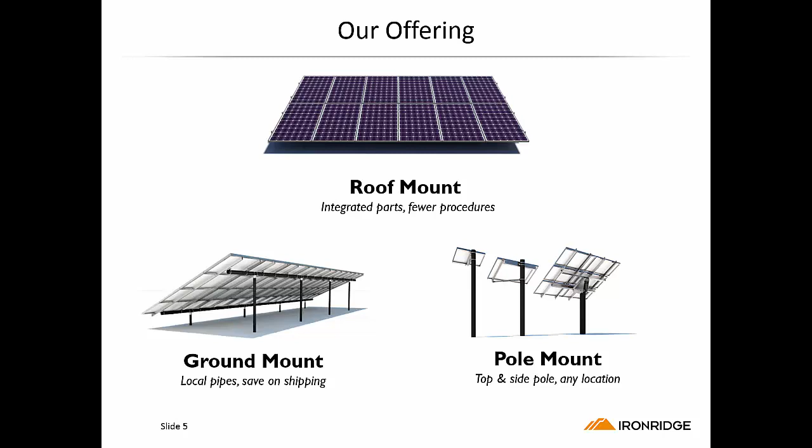We have three separate major lines for our solar racking systems. We have roof mount, we have ground mount, and we have pole mount.

I talked a minute ago about quality, and when I talk about quality of our product, it's not just IronRidge patting ourselves on the back saying we make a great quality product. We like to validate that in many different ways. One of the ways we prove the quality of our product is actually taking it to third-party companies for their evaluation. Anything to do with UL testing, could be the fire testing, or the integrated grounding system, we take to Intertek for all of our UL testing.

We utilize IAPMO, a third-party evaluation service, to evaluate our product and the performance of that product. We are an ISO certified company. If you're not familiar with ISO, it's a third-party organization that's not only looking at our product, but looking at how we interact with the end user of our products. They look at how we're packaging our products, how we ship our product. They're looking at our overall office procedures here at IronRidge, and we are an ISO certified company.

We used to have a tagline saying, "Make solar simple." We truly strive for having a very simple product to use out in the solar industry. In the same token, we really want to have a very robust, strong product as well. Truly, that's our goal, is to make solar stronger. So we changed our tagline last year. We want to provide you with the strongest racking system available out there in the marketplace.

So in today's training, I want to go over a few different items. We should take a look at the roof system itself and some of the challenges with roof mounting. I want to touch a little bit on the code; we'll hit on a hot topic here in California with code. We want to look at the IronRidge product line itself for roof mount, and then we'll spend some time on the Design Assistant tool, designing a system on the tool to show you how it works. Awesome tool. Then we'll go through some installation tips and tricks I've learned over the years that I'd like to share with you.

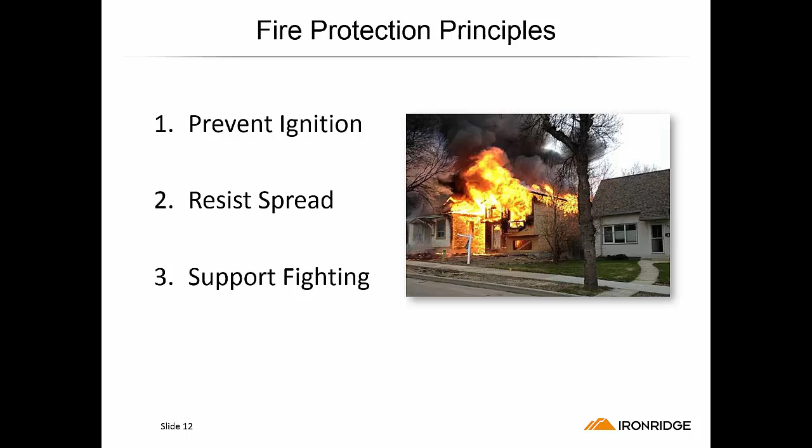What's really a hot topic right now in California, and will become nationwide next year, 2016, is the code changes. International Building Code actually changed in 2012. Just now in 2015, here in California, we adopted enforcing this code. And that's basically stating that a PV system shall not diminish the fire rating of the roofing material on the structure. The key word there is system.

In the past, it used to be the PV modules had to have a fire rating. Now it's the entire system - that includes the racking, which must also have a fire classification rating. What it boils down to is, if you have a Class A fire rated material for your waterproofing membrane of your structure, the installation of the solar system must not diminish the fire rating classification of the waterproofing membrane or the roofing material on the structure.

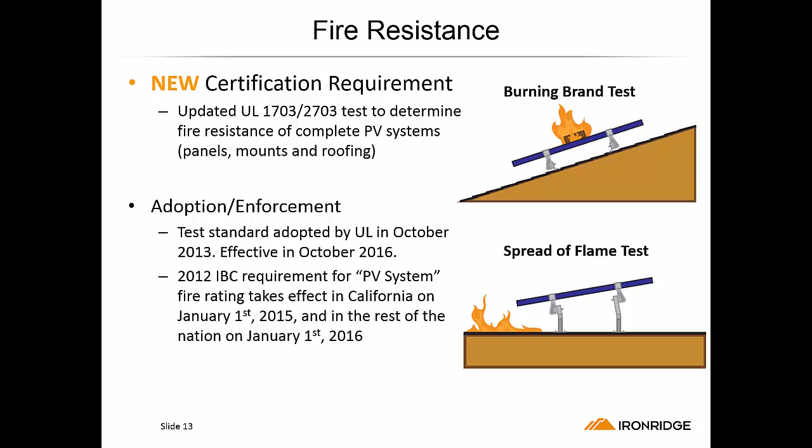As you think of that, I want to let you know that here at IronRidge we've been proactive with this. As soon as UL set the testing standard, we jumped right into working at having our racking system tested under this new code requirement. We've completed three rounds of testing now with steep slope roofs, flush to roof or tilt mounted. We carry a Class A fire rating for Type 1 and Type 2 modules. If you're mounting flush to roof, we are also Class A fire rated for a Type 3 module on steep slope. On your low slope roofs, we are Class A fire rated for flush mounting or tilt up system for Type 1, Type 2, and Type 3 modules.

As I was saying earlier, it's pretty amazing as you get into the solar industry, everything that the solar designer or solar installer needs to be knowledgeable of. It's so much more than just the NEC or the electrical code. We need to be knowledgeable of what Mother Nature is going to throw out there at that location as far as wind loading and snow loading. Definitely need to know the geographical situation and what's there for loading conditions.

NEC, I'm an electrical contractor. I'm a perfect fit for this, no problem there, but I do need to be knowledgeable with the modules that I'm using, what they produce for power, what inverters I'm going to use, the proper sizing of my wiring for my inverters and modules, and definitely be following codes with how I'm going to install my wiring.

I need to have a structural background. I really need to be thinking about the framing of the structure, the spacing between the rafters, maybe just the spans that those rafters are performing in that structure, and what the acceptable loading is going to be as I add a solar system to that structure.

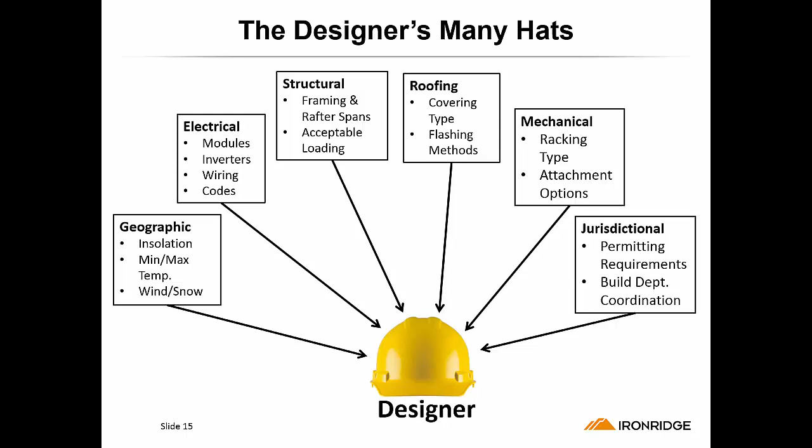Or maybe the building department does not have an expedited permit process, and I need to be really knowledgeable with what the jurisdiction is going to require for obtaining that permit, even with the permit review process, minimizing the time back and forth with the building department, making sure I'm going into the building department with everything they need right from the very first application for my project to make a quick turnaround time to get that permit.

So let's go ahead and take a look at the IronRidge product line itself. Earlier I had noted that at IronRidge our tagline used to be "Make Solar Simple," and truly we strive to maintain that as well. When you look at our product for roof mount, it is a very simple product. We have an integrated grounding mid clamp for attaching the module to the rail. We have 3 rails in a rail family that I'll tell you about. And then we have a great all-in-one flashing product which will make a very quick installation of your attachments to the structure.

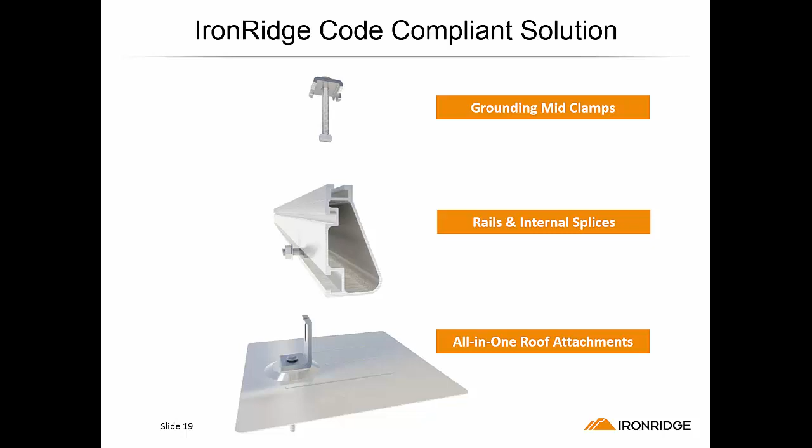In the development of our products for roof mount here at IronRidge, we strive to have a code-compliant product that you can use nationwide. A minute ago I talked about the rail family we have here at IronRidge. We have the XR1000, the XR100, and the XR10. You truly now have a choice in the rail family to choose a rail that's going to be most cost effective for the loading conditions of the site you're designing for. Possibly it's not just the loading conditions, but maybe it's the structure you're working with for installing or designing a solar system.

That XR1000 rail used to be called the XRS rail, and we've renamed it in the new rail family as the XR1000, but it was our signature rail for years. This body shape adds a lot of vertical and lateral strength to our product. So we went ahead and added 2 new rails to our product line, the XR100 and XR10, each a little bit smaller in rail size to work with whatever the loading conditions are and be able to utilize the most cost-effective rail.

Interesting to note is that as you're installing solar systems, you're not installing them flat. Truly, you're putting them on a sloped roof, or in a low slope roof application, you're putting them up on tilt legs. But in all of these applications, you're putting them up on an angle.

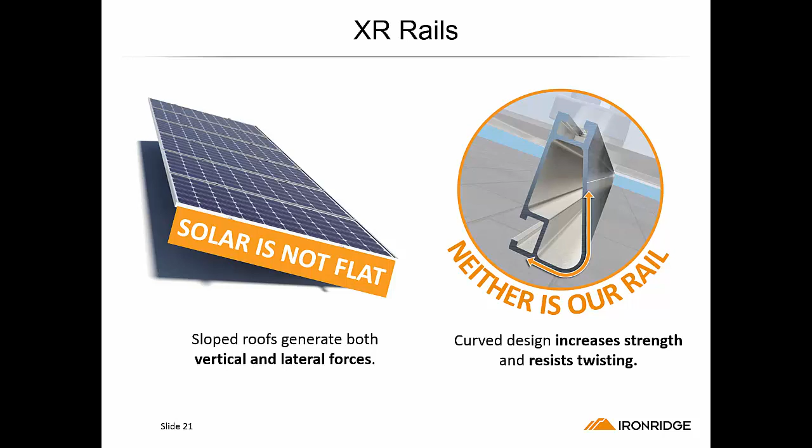And truly, that's where the body shape of our rail adds a lot of strength to the overall installation and attachment of your solar system to the structure. This body shape adds a lot of vertical and lateral strength that resists twisting, and also is going to really hold well as you're installing on these sloped conditions.

Kind of interesting, we had a little fun at the shop at IronRidge one day. We went ahead and built some ramps at a 4-foot spacing, and then tried driving different weight vehicles across different rail just to prove the strength of that body shape. Obviously this was a non-scientific test, but it was a lot of fun actually proving the fact just by driving different weight vehicles across our IronRidge body shape rail compared to the traditional box shape rails available in the marketplace.

Just if you get time, go to our website and watch the video. It was a lot of fun making the video and actually proving the point. My 9,000-pound Dodge diesel truck driving across some IronRidge rail at a 4-foot spacing. Phenomenal, the strength in that body shape.

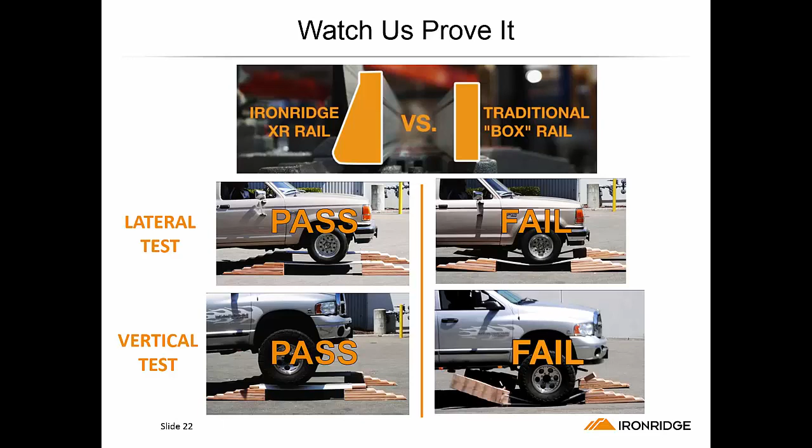Alright, so as we keep talking about all this strength of our product, we need to be thinking about the value of this strength that we keep talking about. And it really plays out in 2 different ways. One of these is the spans that you can achieve between your attachment points in the structure. Obviously, the longer the spacing between your attachments or the spans of the rail, you will be able to design a system that has fewer attachment points in your project. The other option in the strength of our product is utilizing what we call the cantilever strength, and we'll go over both of these here in just a minute.

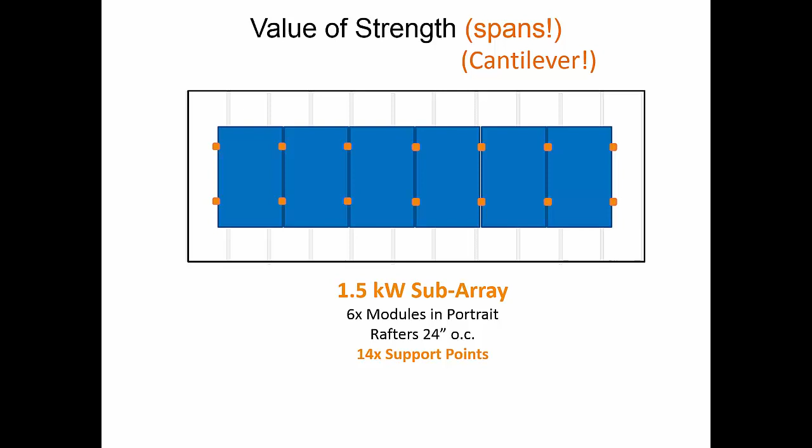Just note, if you don't understand, cantilever is the amount of rail that can extend beyond the last attachment point in the structure. So as we're looking at the XR10 rail at a 4-foot spacing between the attachments, and we start comparing that to possibly other applications, it's pretty cost effective in utilizing this XR10 rail. I call it our small baby rail, at a 4-foot spacing in the attachments. When you compare that to maybe doing a 6-foot spacing of the attachments, yes, that XR10 rail can even achieve up to 6-foot spacing on the attachments. Truly, we can reduce the cost by about 6 cents a watt.

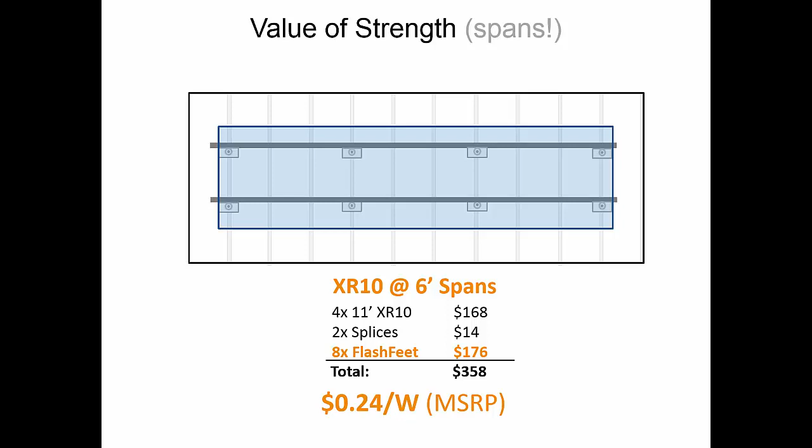These are all suggested manufacturer retail price, so just be aware of that. We use suggested manufacturer retail price as a level playing field in comparison, but truly you're going to get a great discount from any one of our distributing partners on our product.

So as you start thinking about maybe wanting to achieve an 8-foot spacing between your attachments, that's where I would step up. Go to that XR100 rail and then go ahead with an 8-foot spanning and design in your project. You start thinking about the added cost going to that larger rail, that XR100 rail. Your cost has only gone up a penny a watt because you've reduced the number of attachments in your project. So obviously you've reduced your labor as well as the material.

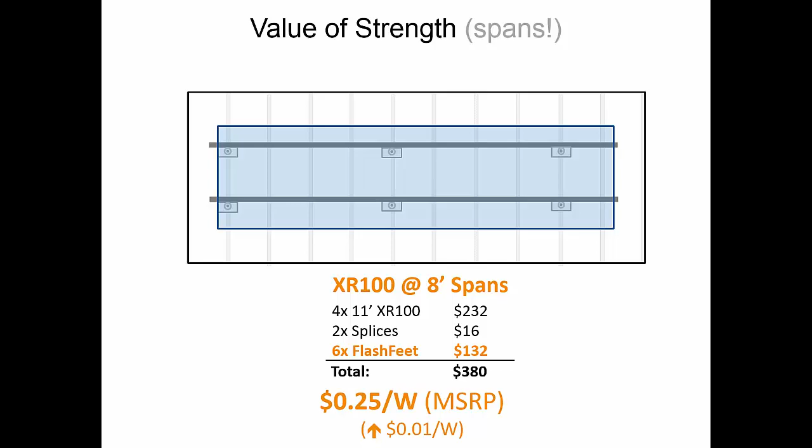So I spoke a minute ago about the cantilever strengths of our product. In all of the body shape in our rail family and that strength that we have in the product of the rail family, this is where you should be thinking about utilizing the cantilever strength of our rail. As you start thinking about going to a 6-foot spacing between your attachments, as you increase the distance between your attachments, you're increasing what we call point loading to the structure. Truly, to turn it back into a distributed loading as much as possible with increasing the spacing of our attachments, we want to be thinking about staggering our attachments in a project if we can. This is where that cantilever strength of our product becomes very valuable.

Truly in 2 rails in a row of modules, as per the bottom illustration here, we can start one rail with an attachment right at the end of the rail. On our second rail in that row of modules, start the first attachment 1 rafter space in. Then continue the spacing of your attachments as per your design, and this is going to give you a staggered attachment in your overall row of modules. It's going to be placing the loading to multiple rafters within that structure, turning it into a very distributed loading situation. Much better for the structure. There's 2 ways that we can utilize this cantilever strength.

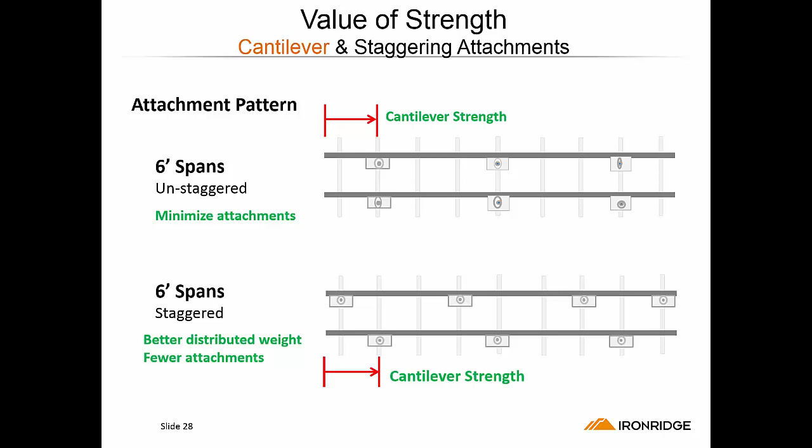If we're doing a fairly minimal spacing between our attachments, like 6 feet, we may want to go ahead and cantilever both of our rails in a row of modules, minimizing the total number of attachments overall. Or your other option is to use that cantilever strength in one of your 2 rails in a row of modules and just do what we call a staggered attachment as per the bottom illustration. Obviously the illustration at the top is going to completely minimize the number of attachments, where the illustration below is going to minimize some of your attachments but provide a very good distributed loading to the structure.

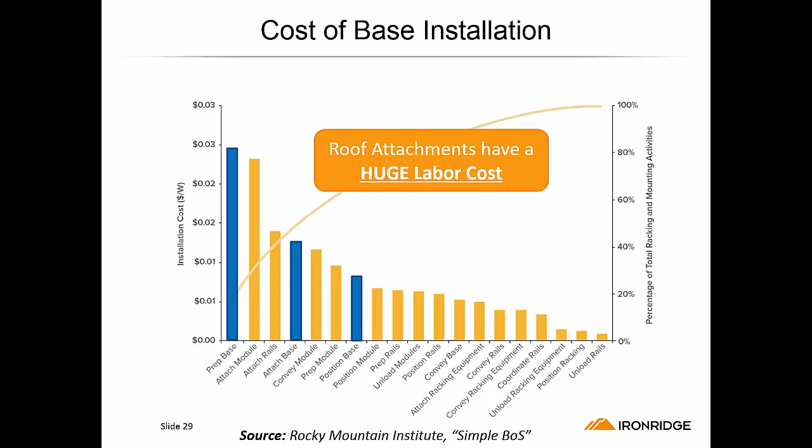Interesting when you look at some studies that have been done recently with overall labor statistics to installing a solar system. What they're finding is the amount of time it takes to install the attachments, to lay out your rafters, locate the rafters, get your flashings installed properly to waterproof your penetrations, seems to be one of the largest labor items in installing a solar system.

Or maybe it's just the spacing you're wanting to achieve in your attachments. Maybe you have very minimal loading, but you want to go to an 8-foot spacing in your attachments. That XR100 rail will be your rail of choice. And then I always talk about the XR1000 as our big bad boy rail. Truly a very phenomenal rail. This rail can span 10 to 12 feet between the attachments. Maybe your rail of choice for a commercial application where you're trying to reach 10 or 12 feet out for your spacing to attach to main purlins in a project.

Possibly you've got some extreme loading conditions. Maybe you're on the east coast to the far north and you've got 80 pounds per square foot of snow loading. And maybe you've got extreme wind loading conditions. Maybe you're in hurricane territory where you've got 150 mile an hour winds. That XR1000 is going to be your rail of choice, whether you're at extreme loading conditions and still doing a 6 to 8 foot spacing between your attachments, or that commercial project trying to reach out 10 or 12 feet to your attachments.

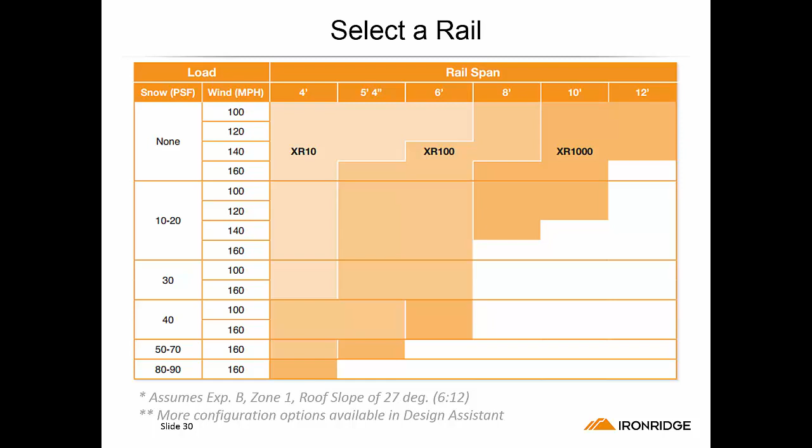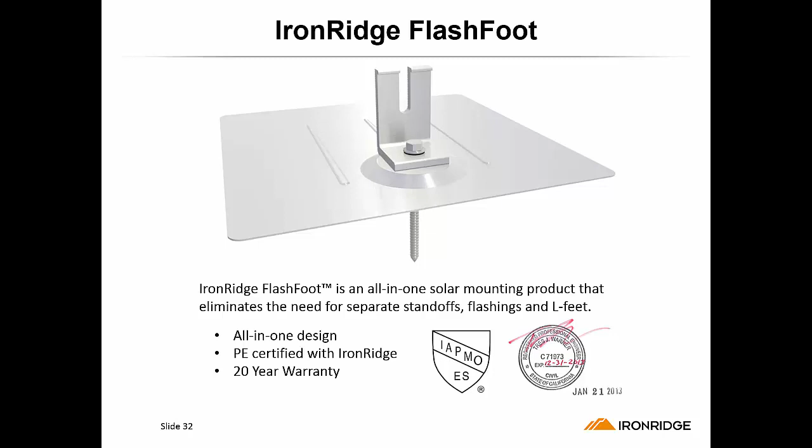FlashFoot. Truly, it's an all-in-one flashing attachment, and it has a great 20-year warranty with it. When you look at our flashing attachment, it has an L-foot with a cone shape. This cone shape is going to compress over a rubber bushing that's in our flashing, and it's going to compress that rubber bushing against the bottom of the L-foot, against the flashing itself, and around the diameter of the shank of that lag bolt, totally sealing off your penetration that you're placing in the roof.

What's really nice about the design, I know a lot of people are a little hesitant with a flashing that has any rubber parts in it, but the way this is designed, that rubber bushing is totally concealed underneath the L-foot, which totally eliminates the rubber bushing from ever seeing any sunlight or air pollution that can break it down over time. So it's very long lasting. Remember, this has a 20-year warranty to it. The other great feature with our flashing attachment is truly being all-in-one.

It installs very rapidly. If you use a chalk line to chalk out your attachment locations, we have some creases that increase the strength of the flashing itself, but are also designed to act as a guide to show you where to place that flashing. No putting your head against a hot roof to look for that tip of the lag bolt and where it has to enter that pilot hole. Truly, if you use a chalk line, you can use these guide marks on the flashing to install the flashing directly over your pilot hole location.

Then you're going to put your lag bolt through the L-foot and use your battery impact gun and drive that lag bolt into the rafter. Once it's tightened down, it's ready for rail. And truly unique is our open slot L-foot, making it a very rapid installation of the rail to the L-foot.

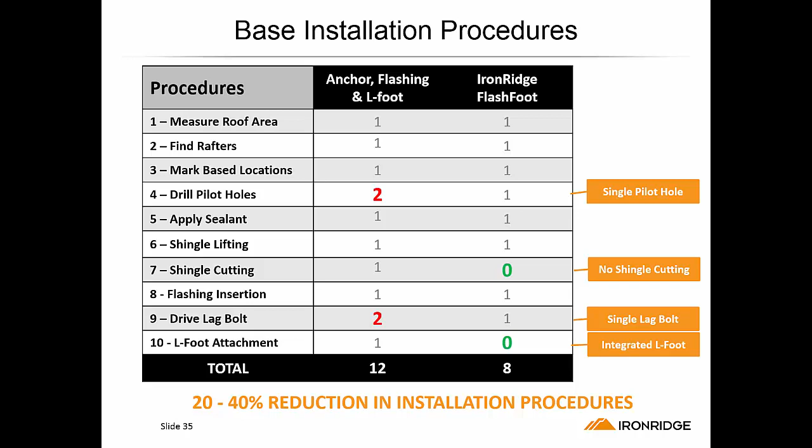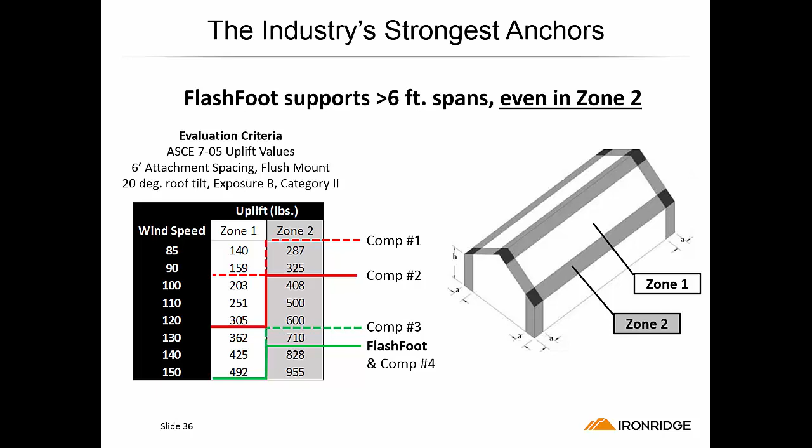When you look at the different steps that are generally involved with installing a flashing attachment, our flashing attachment, FlashFoot, has eliminated 4 different steps in most flashing attachment installations, definitely reducing your labor as you're installing your flashing products. When you look at the overall strength of our flashing in the attachment to the structure, we're side by side with one manufacturer. The two of us are truly the strongest flashing attachments in the overall solar industry. It's almost kind of scary when you start looking at some of the other third-party flashing attachment companies out there and what the strengths of their products are to the attachment of the structure.

Integrated grounding: awesome, simple product, and yet it truly is just great at providing that electrical grounding and bonding connection of the modules to the mounting hardware. Like I said, very simple product. It's a mid clamp with some teeth in it. These teeth bite into the anodization of the module frame, providing a good electrical bonding connection from module frame to module frame, and then it transfers that grounding and bonding connection through a serrated flange nut into

the bolt. On that T-bolt, we've added some teeth to bite through the anodization of our rail and provide that grounding and bonding effect from the module frame to the rails. All of the IronRidge rails are anodized to protect them from corrosion. Just truly a very simple product, but very effective in the performance that it's built for.

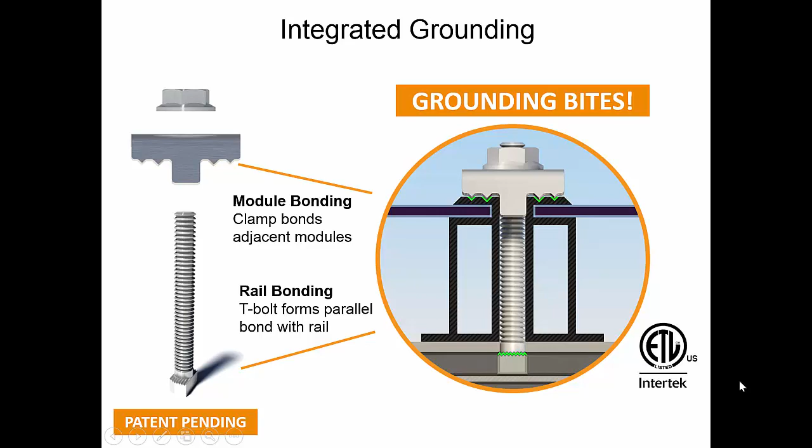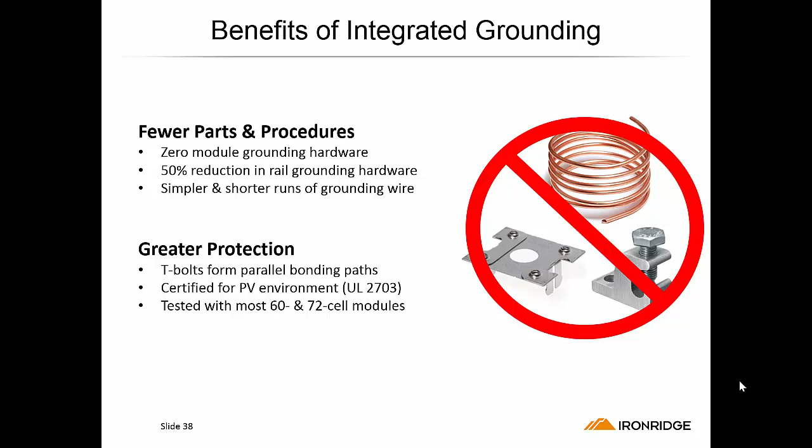The benefits of integrated grounding: so many people just immediately think, no more WEEB clips, and they're just thankful for that. But truly, the integrated grounding system does much more than just get rid of the WEEB clips. It eliminates 50% of your rail bonding and 50% of your splice bonding. And all the multiple parallel paths of bonding through those mid clamps provide a much better, more robust, strong grounding and bonding condition than we ever had in the past.

This can show you right here, in your 2 rails in a row of modules, you only need to place an earth ground connection on one of those 2 rails. Whichever rail you choose to place the earth ground connection on with a lay-in lug, if you have a splice in that overall length of rail, you'll place a bonding jumper at that splice location. The second rail in your row of modules no longer needs an earth ground connection and no longer needs any bonding jumpers at the splice locations.

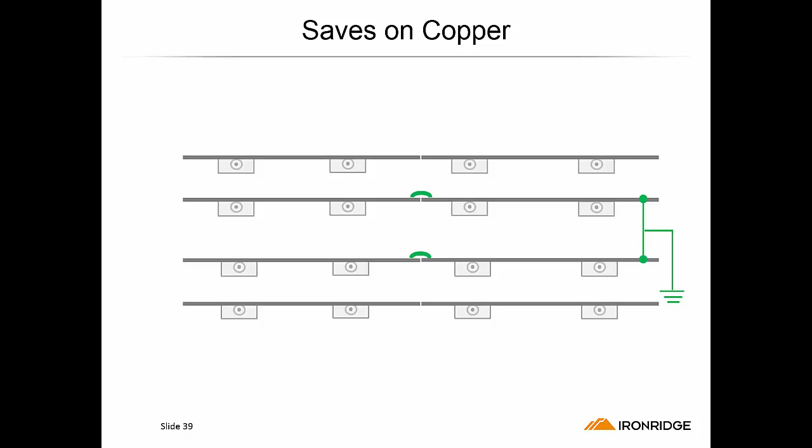So right off, you can see 10 to 15% fewer parts depending on the array layout of your design. Obviously, fewer parts, less cost in materials. Fewer parts, less labor as you're installing your system.

All right, design and permitting. As we get ready to start thinking about selling a solar system, we're going to go out and do a site survey. We're going to get educated on what the local code requirements are with the jurisdiction as far as designing that system. Then we're going to come up with our array layout design, and start thinking about everything we need to provide to that building department for the permit package.

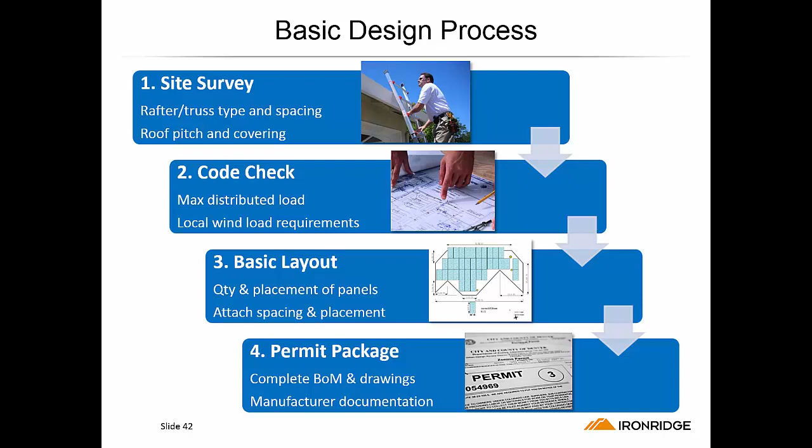At this point, I want to get on our Design Assistant tool and show you how to design a system on it. The Design Assistant tool from IronRidge is just awesome. It does so much for you. It's going to auto-calculate your wind loads and snow loads. It's going to generate a complete bill of materials, and it's going to provide instantaneous pricing in the design tool, so that as you're choosing between the different rails in the rail family, or the spacing between your attachments and the number of attachments in your project, you can make choices that give you the best pricing possible in your design.

So I'm going to take us live onto our website now, and we'll design a system here quickly. Alright, we've gone live onto the IronRidge website, and the opening screen scrolls through some different items that are new to IronRidge that we want you to be aware of. Yeah, the ground mount, we can do 5 up now. The new rail family available here. Just some interesting notes as it scrolls through the opening page of the website.

You'll notice the different product lines listed at the top of the page. Also take note at the bottom of the opening page of our website, you can download a parts catalog. You can open a tool that shows you how to use Design Assistant. You can also check webinars to see what other training events I have coming up, including live training events and webinars. Be glad to have you join in on some of those as you have time.

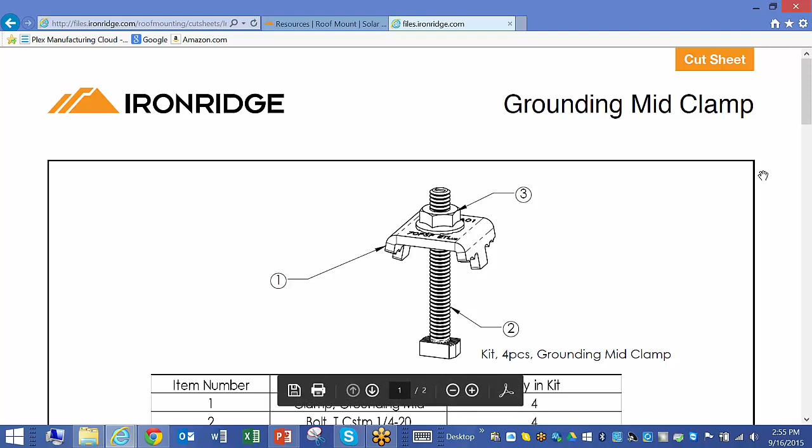Also, what we have here available is cut sheets. We have all of our different product lines for roof mount listed here. You can go ahead and click on a specific product like grounding mid clamp, hit download, and it's going to give you an overview of that product, giving you all of the dimensions of that product, all of the materials that that product is made out of. So just some great information here as you're looking maybe for some physical dimensions of some of the different product lines. Just take note that that's available here for you as well.

Below that, we have certification letters. We have a third-party engineering group that's going to provide you an engineering document to have as part of your permit package. Go ahead and choose whatever state you're located in. We have 38 states and 3 countries available here. I'll go ahead and click on California because that's where I'm located.

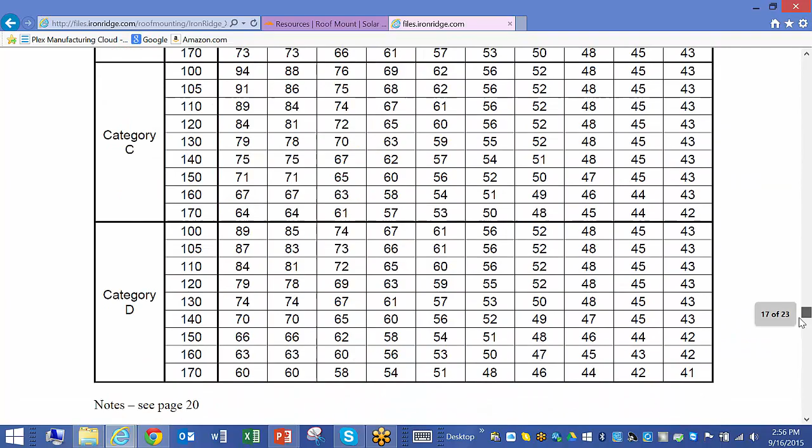Let's just say we're doing an XR100 flush to roof and hit download, and it's going to provide you a third-party engineering document. It's going to have a cover page. It's going to go through a series of charts - go ahead and print out the charts that are pertinent to your design. Then we actually have a stamped document page, a final page in the engineering document, where you can provide this as a document in your permit package showing you have engineering review of your project.

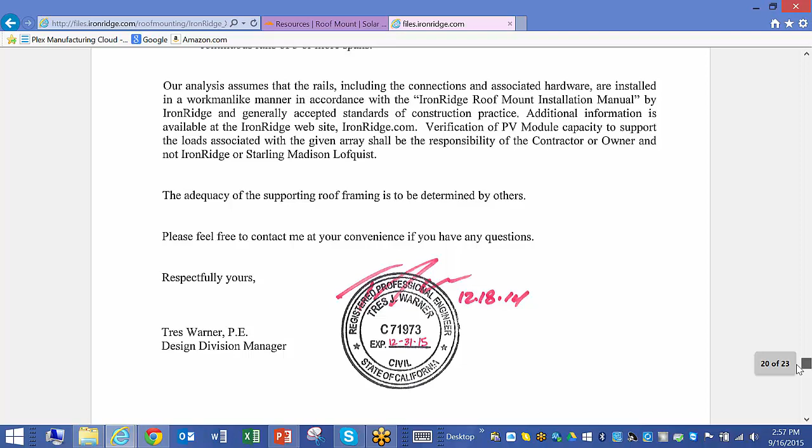Below that, we actually have some detailed drawings that are very useful to not only have as part of your permit package, but then to also print out and have with your installers out in the field as they're installing the system and calling for inspections.

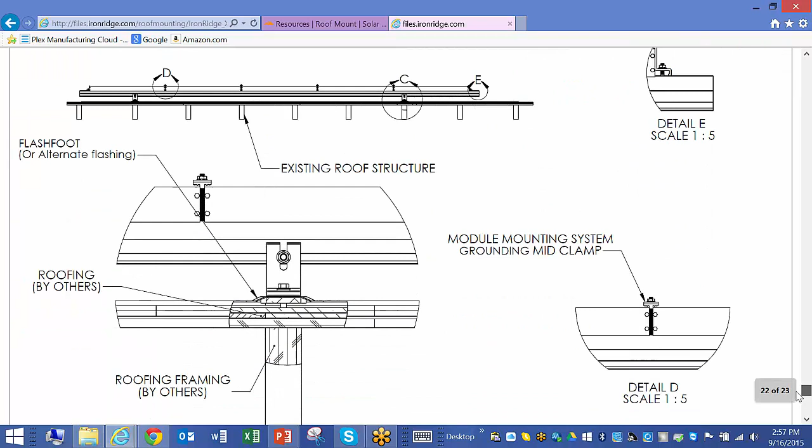An inspector may question how something is installed, and you can show them in the detailed drawings that it's installed exactly as per the manufacturer's requirement. That should alleviate any problems with your inspector out on the job site. So a great resource here for you as you're moving forward with your design.

So let's actually get into building a design here. Next item down, we're going to click on Design Assistant. Virtually anyone can get on our design tool and utilize it.

There's no charge for using our tool, but I suggest that you open an account with IronRidge, because by opening an account you can do quite a bit more. There's no charge for opening that account, but it allows you to save your projects and share your projects. Really important as you do design for a system or for a customer.

As you do a design for a customer and take that back to sell the project, the customer may really like your pricing and decide he wants to go larger with his solar system, or maybe he wants to reduce the size of the system. If you've saved your project, it makes it very easy to go back and quickly make adjustments to the first design, then go back to the customer with final pricing and a final design.

Having that account also allows you to share your projects. When you share your projects here at IronRidge, you don't share them out across the internet — you share them in a private location on the IronRidge website, so your projects are very well protected. The only people able to view your projects are the people whose email address you input and select to view the project.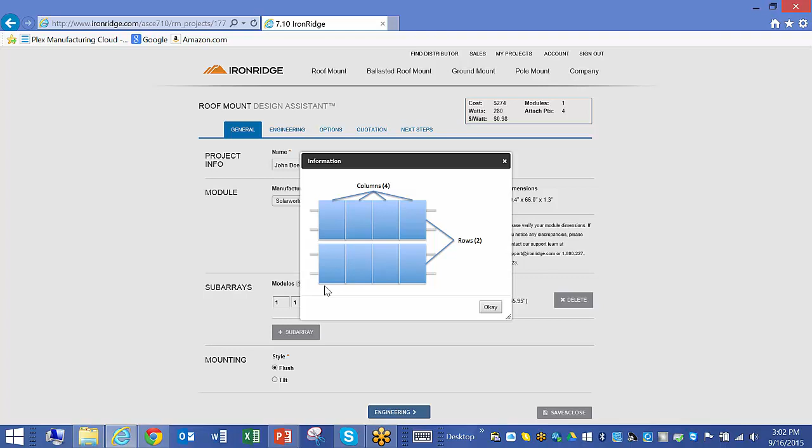In today's training, let's do 6 modules and 4 rows of that. We'll leave these in portrait, and in this design, let's say that with this roof, there's maybe some room along the bottom edge by the gutter line where we could place another row of modules, but there's not enough room to put these in portrait.

So I can add a subarray, and let's go ahead and add some more modules in here. Let's say 4 modules in one row, but we're going to do these in landscape. I'm just showing you that you can design in portrait or in landscape.

One thing you should note is that with module manufacturers now going to smaller frame sizes, there are some module manufacturers that do not allow their modules to be mounted in landscape. So be sure to check with the module manufacturer if they allow their modules being mounted in landscape.

Literally, this program is very flexible. You can keep adding more and more subarrays. Possibly this first array section is on a south-facing slope of the structure, and you're wanting to design another array area that's on a west-facing slope of that same structure. Truly, you can keep adding more and more subarrays if needed.

I'm going to go ahead and just leave it right now. We're going to build this one array area. We've got 6 modules in a row, 4 rows of that, all of these in portrait, and then I've got 4 more modules mounted in landscape in one row, maybe at the bottom or maybe at the top of the array area.

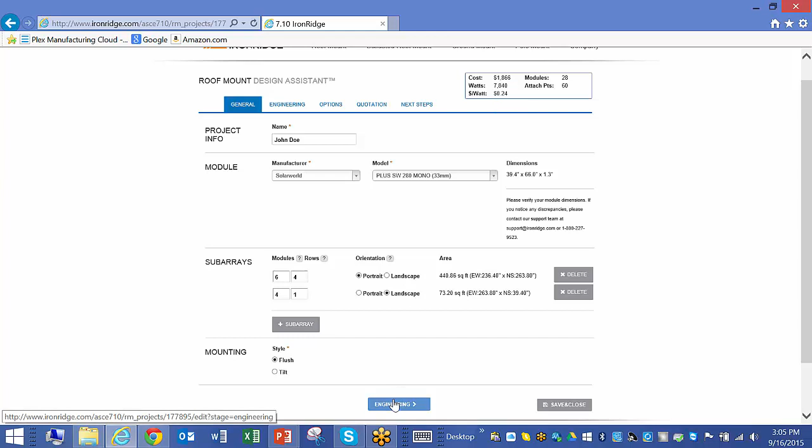At the bottom of the page we have the next selection, and that's our engineering page. As we start on the engineering page, first thing we need to do is give this job site a location. So I'm going to give it my zip code area, and by entering the zip code it's going to know right off what city and state I'm located in. I'm in Modesto, California, Central California area, Central Valley area, and it knows from that what the local jurisdiction is requiring for loading conditions of the design.

So down under snow and wind, further down in the engineering page, it's auto-filled that I need to design to 100-mile-an-hour wind speed and that I have 0 snow loading at this location to design to.

Now, something to note with this - I used to build a lot of solar systems in the Sierra foothills area of California, and in that zip code area, I could be building a site that was at a 500-foot elevation, or I could be building a site up towards Lake Tahoe, all the way up at about 5,000-foot elevation.

Be a little bit careful with the zip code autofill of your loading conditions. If you're designing a system in an area such as the Sierra foothills where you have a large elevation change, or if you have some very large deep canyon areas where it could have very high winds, I would suggest that you call the local jurisdiction, the permit or building department, and actually check with them with a street address the loading conditions that you need to design to for this project.

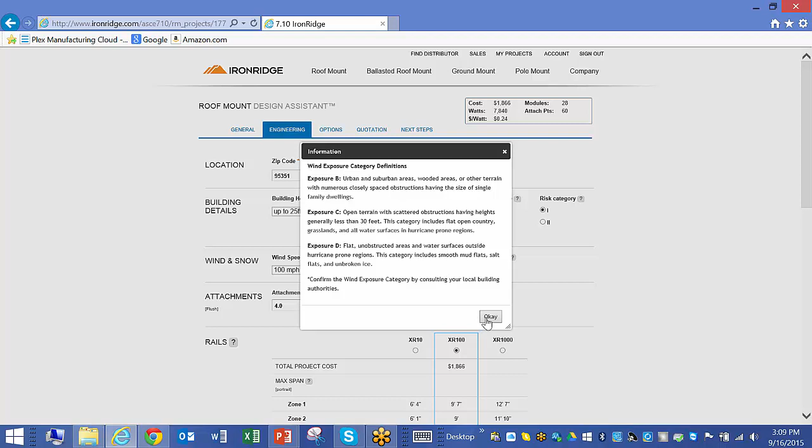So here in Modesto, in the farmland area I'm living in, I could be building a solar site on a building in a residential area with plenty of houses and trees and buildings around within a 3-mile radius to break up wind in a storm event, which would put me in exposure B type category. I could be building this on a farmer's home out in some open farmland with no buildings or trees around me for a 3-mile radius, which would easily put me into an exposure C type category. So just get an understanding of what we're asking of you. For today's training event, I'm going to leave it in wind exposure B.

Risk category. If you're doing this in a residential area, you'll pretty much always be in risk category 1. If you happen to be building on an emergency service building, such as a police station, fire station, or school, it could bump you up into risk category 2. If you're installing on a meeting hall that has more than 250 people assembling at one time, that could also bump you up into risk category 2. For today's training, I'm going to leave it at risk category 1 - we're going to say this is in a residential area.

Next item is your loading conditions, auto-filled with 100-mile-an-hour wind speed. Now, in some jurisdictions, they're still working off of ASCE 7-05 for the structural engineering. Under ASCE 7-05, I would really only have to design to an 85-mile-an-hour wind speed. But we want this tool to be utilized nationwide, which means we need to make it code compliant for the most stringent or latest structural engineering codes. So under the latest codes, ASCE 7-10, we're designing to a minimum of 100-mile-an-hour wind speed. If you call the building department with a street address to really make sure you're designing to the proper loading conditions, you can add some snow loading in here if you need to, or adjust the wind speed if you need to.

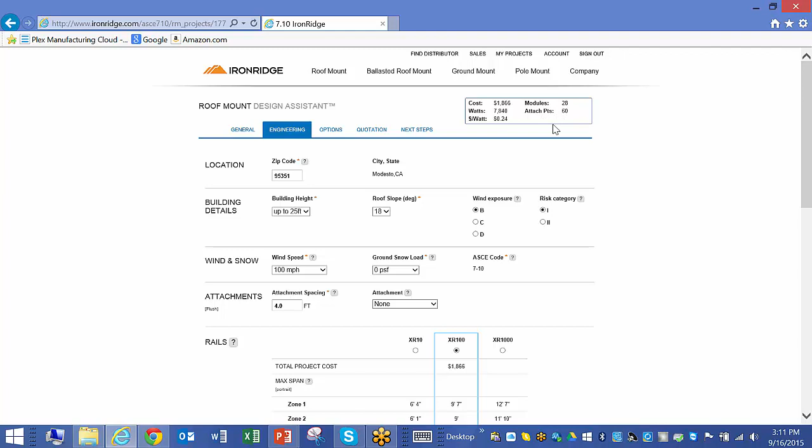The next item down goes into attachments for our structure. Some things I'll note before I scroll down here - if you'll remember, in this box at the top of the page, we have 60 attachment points in our project right now, with 28 modules. The attachment points is really what I want to note at this point. We're going to scroll down here just a little bit so we can see more of the page in the engineering. The next item down is our attachments.

The tool starts off with a 4-foot spacing in our attachments - pretty close attachment spacing, every other rafter just about. It opens up with no attachment products. Just note that if you choose none here on your attachments and you're going to use a third-party manufacturer's flashing product, take note that we're going to provide you in the bill of materials an L-foot that you'll mount on top of that third-party manufacturer's flashing product. If I was doing an asphalt comp shingle roof, I would probably choose the IronRidge FlashFoot as my attachment product. We're going to go ahead and use FlashFoot for our attachments right now in this overall project.

Alright, the next item down, we start seeing the rail family here. We also start seeing what we call zones of the roof. If you're not familiar with what zones of the roof are, you can click on the question mark and we'll give you an explanation. Basically, zone 1 of that roof is everything within the exterior walls of the structure. Zone 2 is your eave overhangs of that structure or that roof line. Zone 3 is where the eave overhangs intersect each other in the corners of that roof. So just take note of the different zones of a roof.

Now as we start looking at these different zones and then looking across at the rail family, we're seeing the maximum spacing that we can perform with that rail under our loading conditions for that project. So if we look at this XR100 rail that the design tool opens and utilizing, we see a cost factor of 18.66, and we see that we can do a maximum spacing in the attachments of 9 foot 7 inches. Pretty phenomenal. Even zone 2 of that roof, that eave overhang area, I can go 9 feet between my attachments.

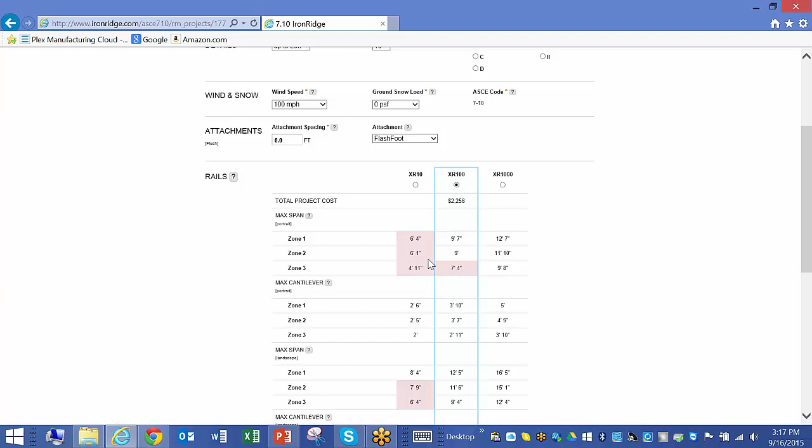It could be that we have a very robust structure that we're building this solar system onto. Maybe I do want to bump up to that XR100 rail and look at the cost if I go ahead with an 8 foot spacing between my attachments. If I put 8 feet in here for my attachment spacing now, you can see I can no longer use that XR10 rail with an 8 foot spacing, but I can use the XR100 rail, and I'm up to 22.56. So it may cost a little bit more for the overall product. I was at 21 something here with the XR10 rail, but what I have reduced is labor in my project.

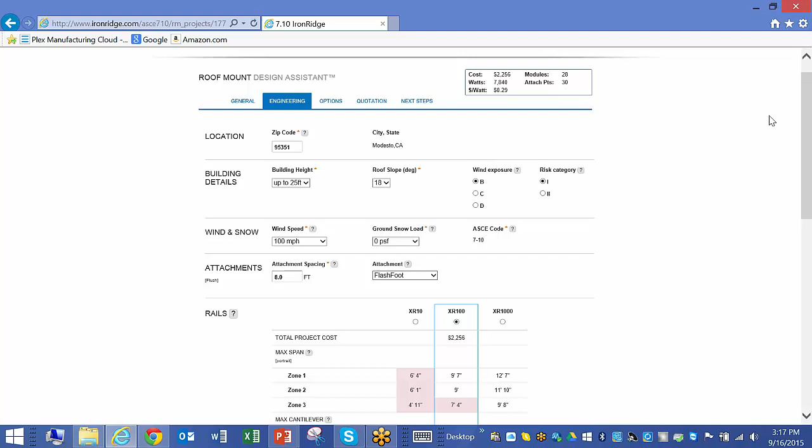If I scroll back up and look at my number of attachments, I only have 30 attachments. I've eliminated another 10 attachments in my project. Remember in those charts we were looking at earlier, the labor costs that we're spending on installing a solar system, a large percentage of our labor is spent on installing those flashing attachments. So even though I'm spending just a little bit more money with that XR100 rail, I'm going to save in labor in my project.

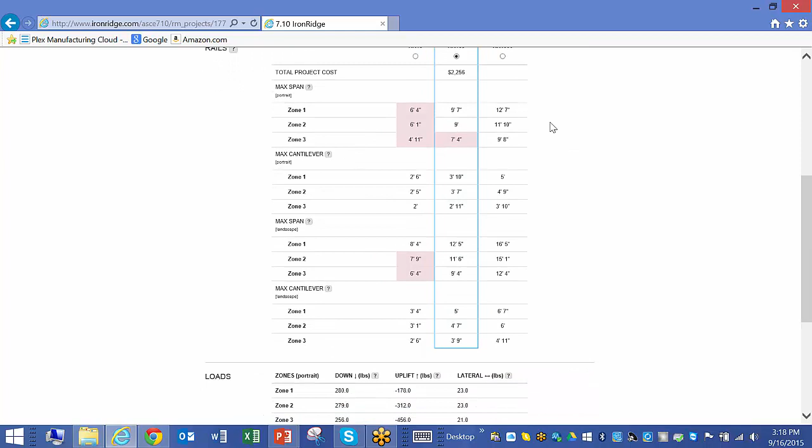So you can see here very quickly you can toggle back and forth between a few different items and justify what is going to be the most cost effective for both materials and labor. So I think I'll leave it at the XR100 rail and a minimum number of attachments, going with an 8 foot spacing in my attachments.

So a couple other things I want to point out down below here as we scroll down is we're going to provide you on this engineering page a huge amount of useful information with the loading down here. It could be this is an older structure and you're going to do that 8 foot spacing, but you're not really confident of what the structure can take for point loading on that roof. If you're going to go to a structural engineer for review, this information right here will save the structural engineer a lot of time and headaches trying to figure out what the loading is going to be of the actual solar array on that structure.

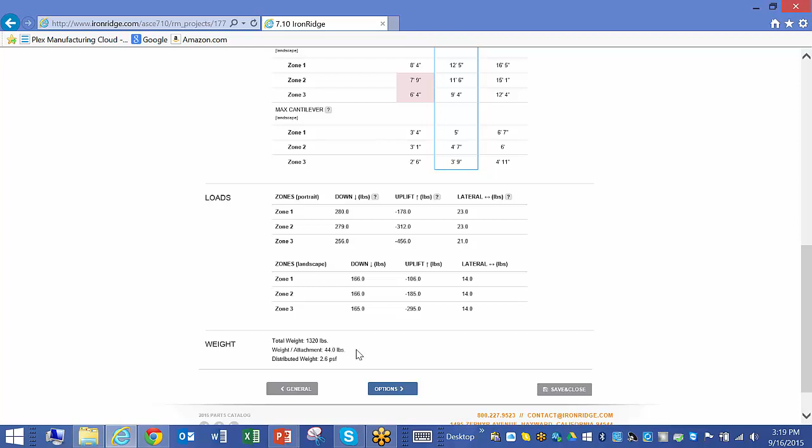We're going to give you all the lateral forces. We're going to give you all the wind uplift forces, all the downward forces that are going to be applied to that structure. We're going to give you that for both the portrait section and the landscape section of your project. If you look at the very bottom here, we're going to give you some weight details that could be very useful information if you're going through an expedited permit process through the building department.

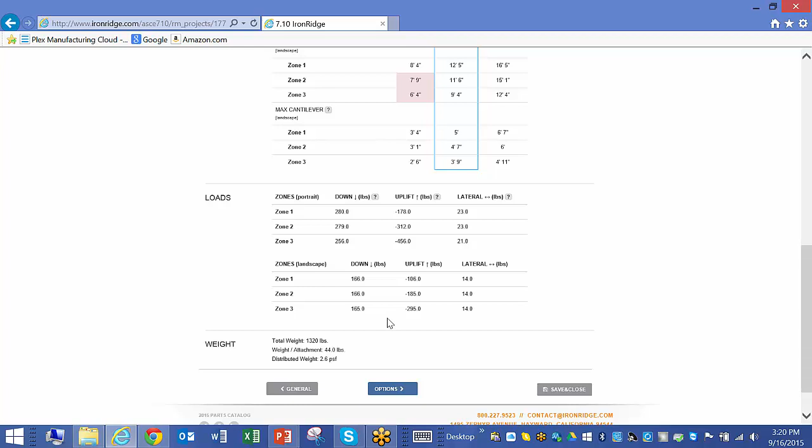Some jurisdictions will say, okay, no more than 45 pounds per attachment. And as you look here, you're at 44 pounds. Hey, I'm golden. I'm good with an expedited permit. Some jurisdictions will say no more than 3 pounds per square foot for your design. You can see here that we're at 2.6 pounds per square foot on distributed loading to that structure. Great information here for an expedited permit process or for going to a structural engineer for review.

Next item is our options page in the design tool. Under the options page, you can go ahead and choose the length of the rail that you're going to provide in this project. Our stocking lengths are 11 foot, 14 foot, and 17 foot. These stocking lengths are based around the most widely used modules in the industry today in fitting 3 modules, 4 modules, or 5 modules with the least amount of wasted rail.

It could be a very large commercial project you're wanting to do. Maybe you're wanting to use some custom length rails to minimize number of splices or something like that. You can actually order up to 20-foot lengths under custom cut lengths of rail. Now just note that if you go with a custom length, it's going to be an added charge for shipping, and there will be a time delay on actually receiving your product. So most people are just going with the stocking lengths. This way the stocking lengths are probably readily available at your distributing partner of ours.

Next item down is the grounding method that you're going to utilize. About everyone is using integrated grounding. It automatically comes up that way in the design tool. The integrated grounding comes with a T-bolt automatically, but you do have a selection here. If you wanted, you could go to an old style mid-clamp with a WEEB clip, or choose none and figure out your own grounding method. But about everyone is utilizing integrated grounding in the IronRidge product line.

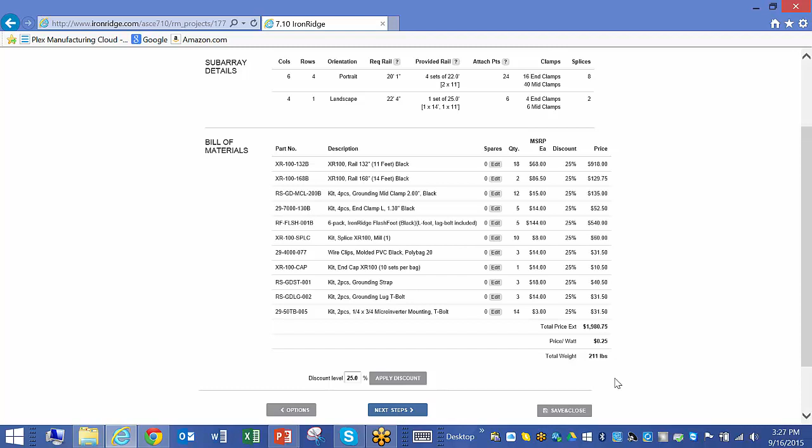Alright, the next page in the design tool is our next steps page, and this truly has most of the same items that we saw in that resource page before we got on the design tool. You can share your project with another design user. You can print your project here. You can download your project into a CSV file if you want.

You can look at different parts through AutoCAD drawings. If you don't have AutoCAD available to you, you can download these drawings in a PDF file if you want. You can print out an install manual. That engineering document I told you about, you don't have to backtrack to that resource page. You can go ahead here at this location and receive your engineering document as well.

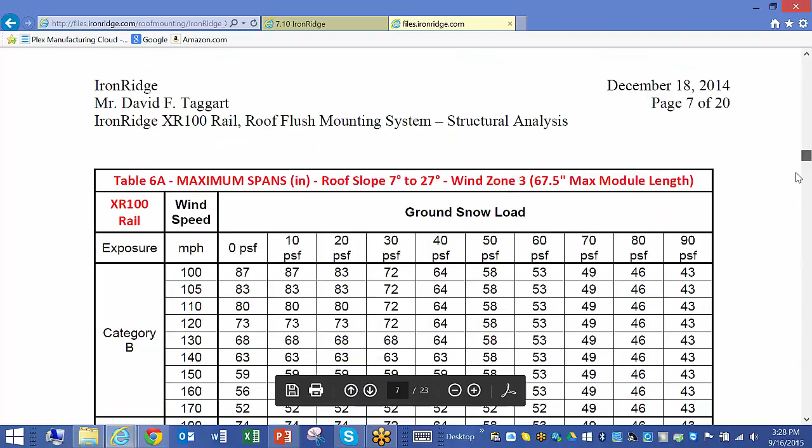We're California, we're doing flush to roof with the XR100 rail, and hit download, and this is that same engineering document that we saw earlier where you have an actual printed stamped engineering document. Provide that and have that part of your permit package. Remember that you have these detailed drawings below that engineering document as well to print out, have part of your permit package, and also have that with your installers out as they're having inspections from the local jurisdiction.

So just take note, this is the design tool. We went through a lot here in a relatively short period of time. It's a very user-friendly tool. You can design a system in just minutes once you familiarize yourself with the tool. You can't break the tool. Highly encourage you to jump on here, play around with it, see how quickly you can look at the different cost factors with the different rails in the rail family. Make selections between the attachment spacing and which rail you're going to use, loading conditions of your project with the spacing that you're doing between your attachments, with your distributed loading and your point loading at each attachment point. Awesome tool here for helping you design your projects.

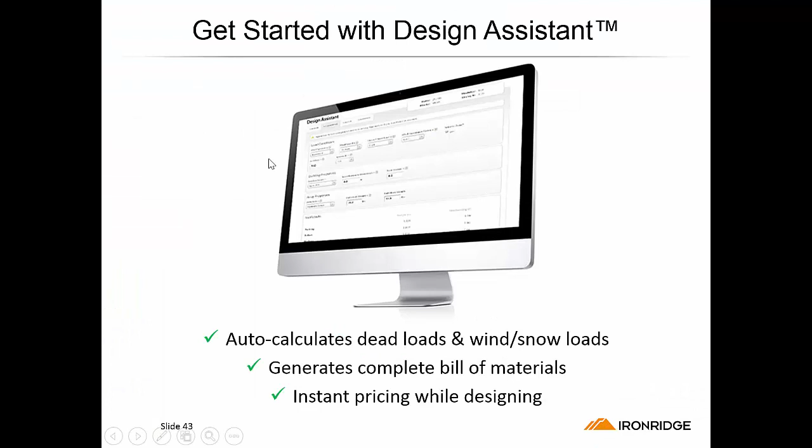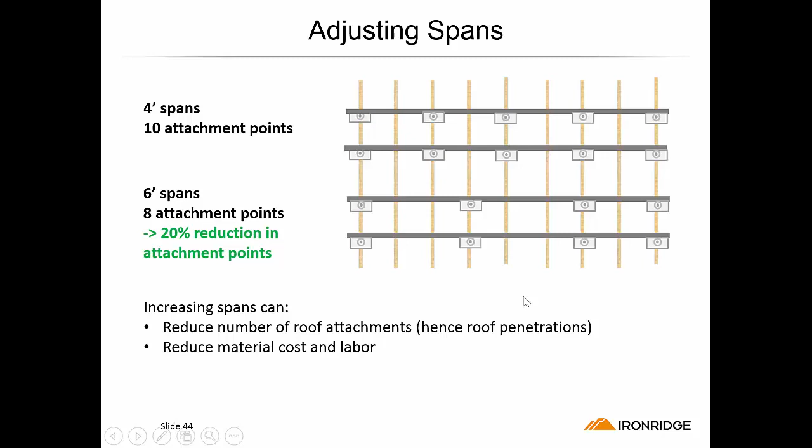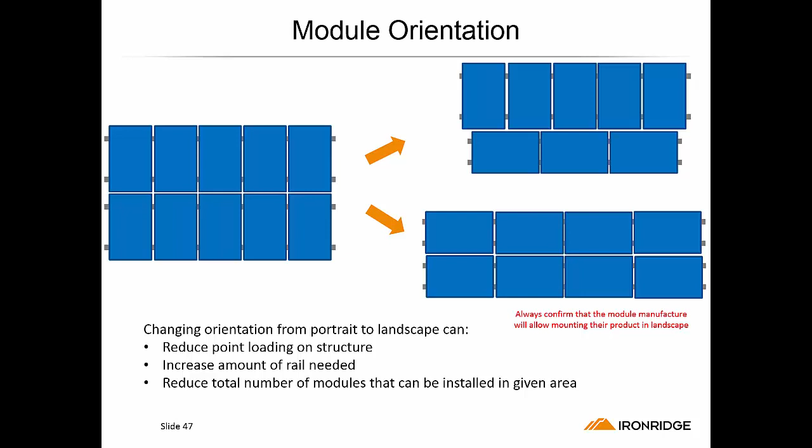Remember that you should be checking with your module manufacturer. Our design tool will allow you to design your system with any module manufacturer in a landscape format. But just remember that with some of the smaller frames on modules today, some of the module manufacturers are not allowing their modules to be mounted in a landscape format.

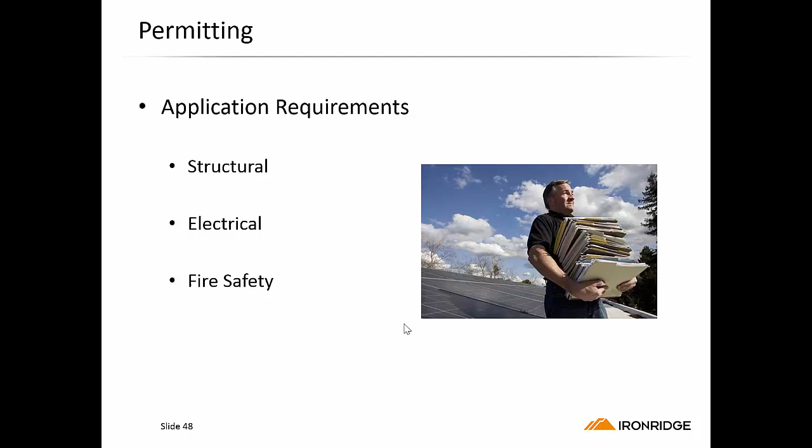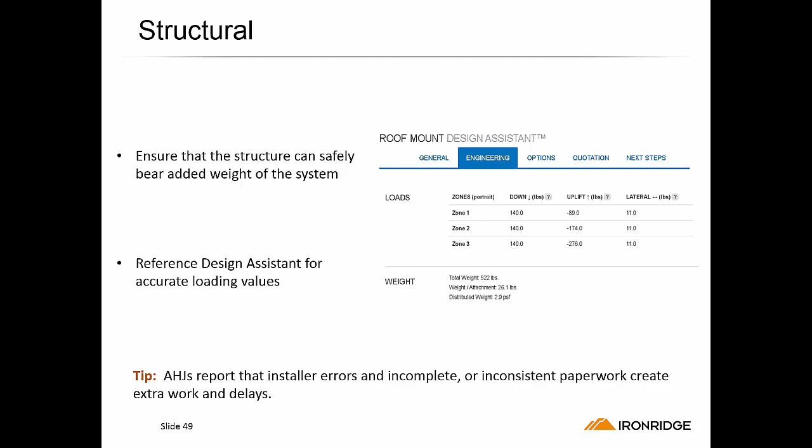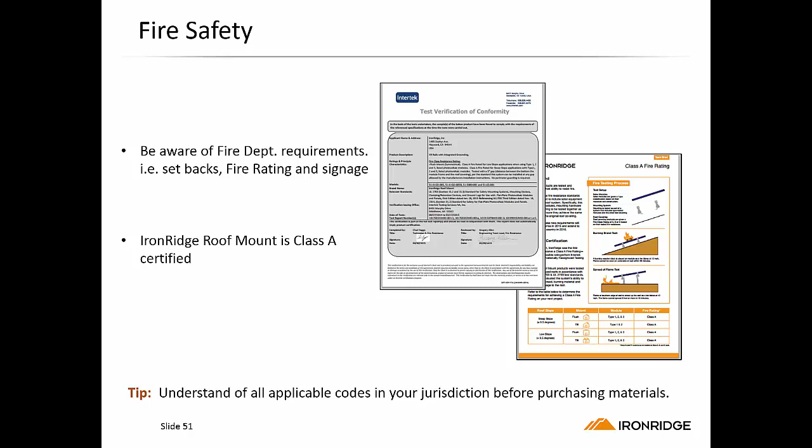Remember all of the items that we have on our design tool to incorporate those into your permit package. The structural documents, the electrical documents, and the fire safety documents. Under the structural, have that design tool printout as part of your permit package. It's giving all the loading conditions for your project, showing that maybe you fit into an expedited permit process for the building department. Provide a copy of the UL listing for our integrated grounding system and a tech sheet on integrated grounding as part of your permit package. Print out the documents for our fire testing, showing that we have a Class A fire rating for our racking system as part of your permit package.

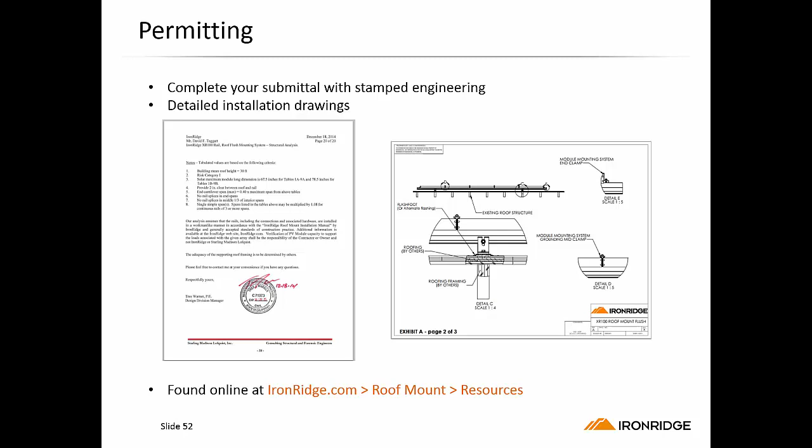Definitely on the permitting, don't forget to print out that engineering document and have that part of your permit package, and those detailed drawings. Try to remember to have those with your installers out in the field during inspections with the jurisdiction.

We know your whole process. We understand it very well. We want to provide you an awesome, very robust, strong racking system. But over and above that, we want to help you with the design process. We want to help you with all the permit documents that you're going to need. We've got an awesome lineup of distribution partners for you to be able to purchase our products. And then, like I said, our rule of thumb is really to have a simple product for you to utilize. It's very simple to install, very integrated to work with everything that you're doing.

All right, let's go over some installation notes here quickly. As you get into building your project, don't forget to be safe out on the job site. As you're standing up ladders to access the roof, definitely stand up that ladder properly, making sure that it's safe for personnel to get up on the roof. As you get up on the roof, definitely use your safety fall protection. Definitely have all the personal protection equipment. You're up on the roof or even on the ground, I'd be wearing that hard hat. Protect yourself from items that could be rolling off that roof.

Definitely up on the roof, have your fall protection on. Have a good harness. Take care of your eyes when you're out on the job site. Wear your sunglasses—that UV sunlight will tear up your eyes over a long period of time and years of installing solar systems. Think about your body and take care of it as you're working on these systems.

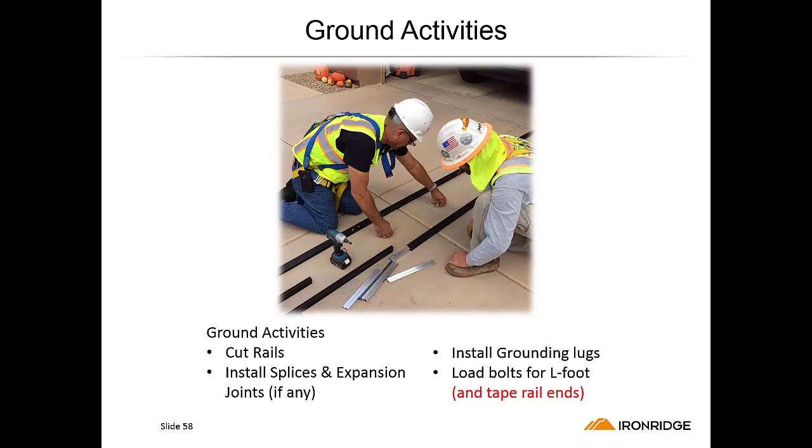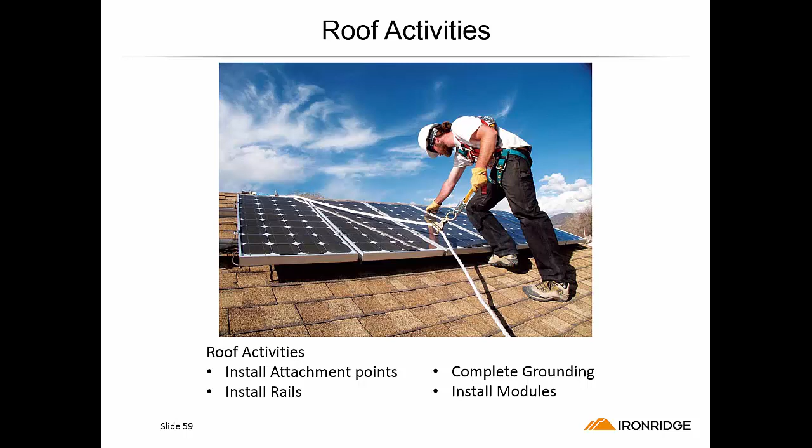Our rail is lightweight. It's very easy to send to the roof, pre-assembled, ready to rock and roll for your project. When you get up on the roof, start installing those flashing products. Go ahead and do your array layout. Snap your chalk lines for your attachment locations. Locate those rafters and get your rails installed. Get all your wiring performed, get your grounding completed, and start installing modules.

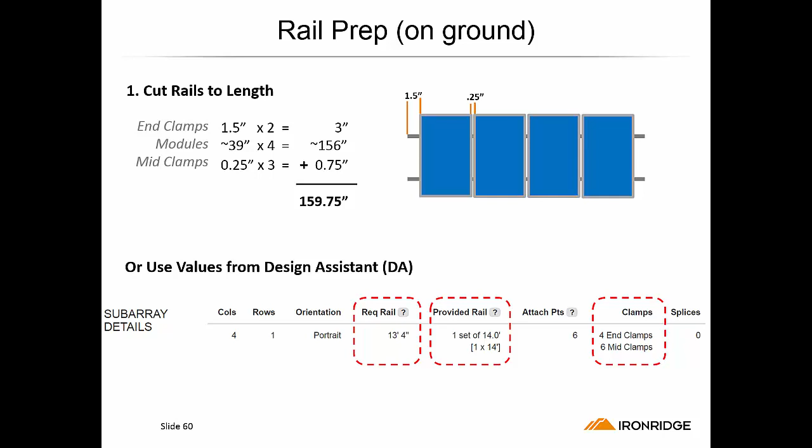Remember, as you're designing your system on our design tools, we're going to give you those exact dimensions that you need to cut those rails to as you're prepping your rails before sending them to the roof.

Also note, as you're doing your splices on your rails, on the rail you're providing as the grounding rail, you'll install the lay-on lug, your earth ground connection, on that one rail. At the splice locations in that rail, you will provide a bonding jumper. The splice piece comes with a self-tapping screw and is in one bag. In a separate package is your bonding strap, which comes with 2 star washers. As you install the bonding strap under the Tek screws that come with the splice piece, make certain that star washer is located between the rail and the bonding strap—that star washer is what's providing the UL listed grounding between the rail and the bonding strap. Make sure you're installing that properly.

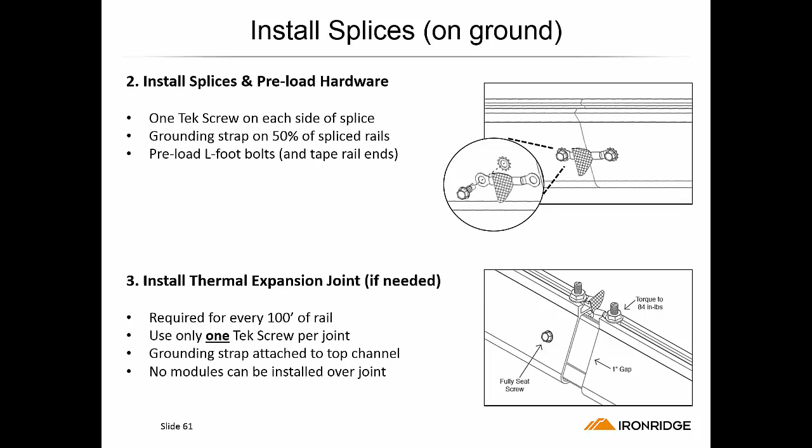If you have a continuous run of rail over 100 feet—probably only on a commercial type application—at 100 feet you need to build out what we call an expansion joint location. There, you'll slide your splice piece into the first rail and install your self-tapping screw, then slide the second rail onto that splice piece without installing a second self-tapping screw. This allows the rail to expand and contract at this point, leaving an inch of spacing between the two rails. At an expansion joint location, we provide different hardware for the bonding strap: 2 T-bolts that you'll install in the top of the rail, as per the illustration.

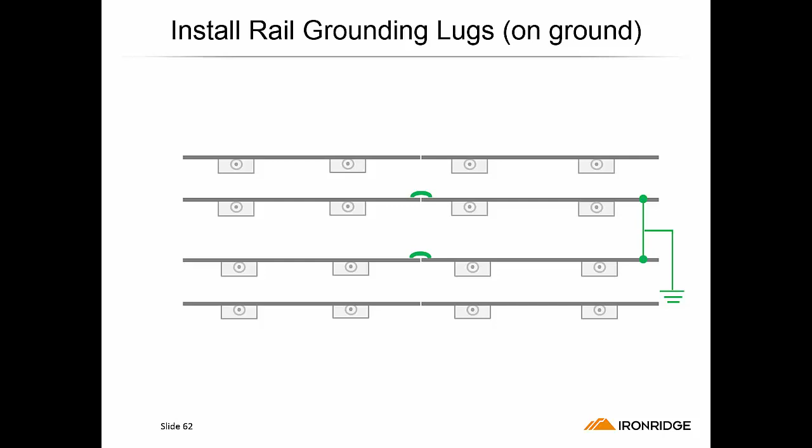Remember, on the integrated grounding, as you get your rail ready to send to the roof, you'll select one of your rails in a row of modules to place that lay-on lug earth ground connection on. If you have a splice in the overall length of that rail, this is the location where you'll place a bonding jumper at that splice. The second rail no longer needs any grounding support.

Alright, you get up on the roof and you're trying to locate those rafters. There are several different ways of doing that. You can take the old hammer effect and do the rap tap tap on the roof—it's pretty easy to feel and hear the sound density of where the rafter is located. Primarily, I'd probably look at the eave overhang areas to see where the rafter is located, then measure from the edge of the roof to that rafter location and transfer that measurement to the roof for where my attachment points are going to be.

Once you've located a rafter with your first attachment, it's pretty easy to measure out where the rest of your rafters are going to be located, on a 2-foot or 16-inch spacing between rafters.

There are different instruments available in the marketplace, density sensing equipment, where you can, pretty much like a stud finder, locate the rafters.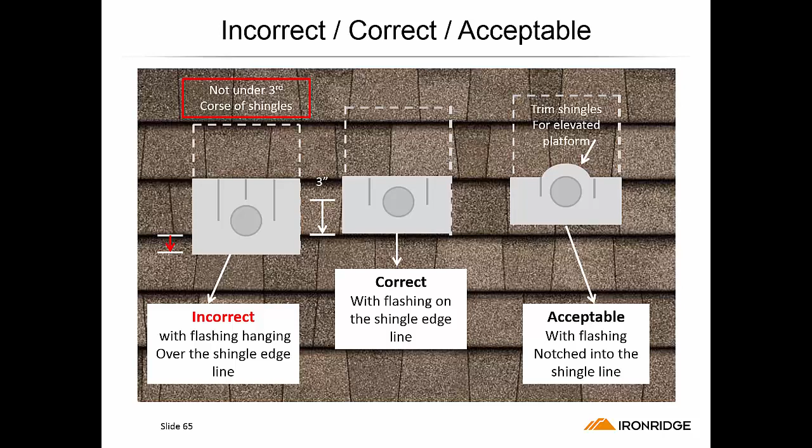You can shove that flashing up a little further if needed, but note that if you push it up far enough that the next course of shingles rides up on that elevated platform, trim those shingles back so they don't divert water onto the elevated platform of our flashing product. Remember, the FlashFoot product installs very quickly.

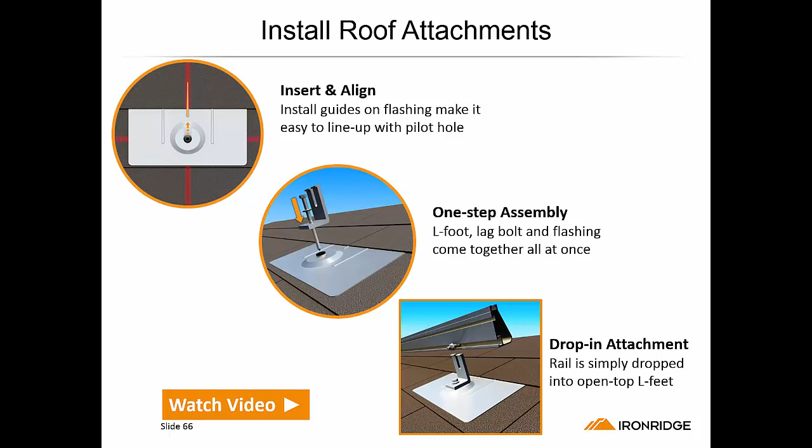Remember, you have guidelines on the flashing product that illustrate where the actual pilot hole is located, saving you from having to put your head against that hot roofing material to visually see where the lag bolt is entering your pilot hole. It's a very simple installation: the lag bolt goes through the L-foot, into the flashing, tighten that lag bolt down, and that open slot L-foot makes it very easy for rapid installation of the rail onto that L-foot connection.

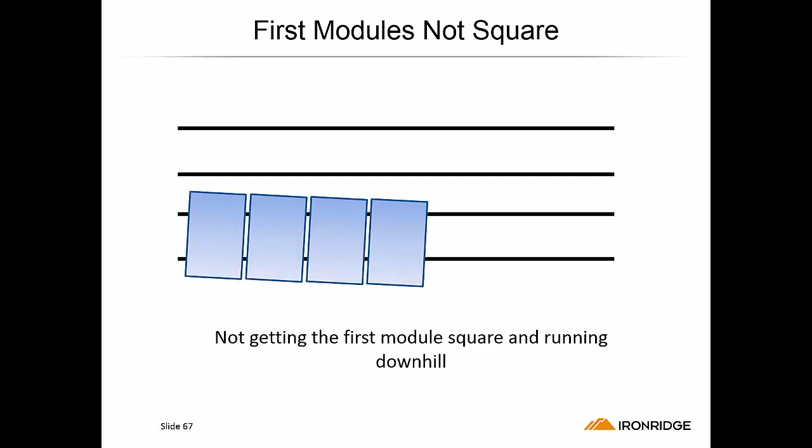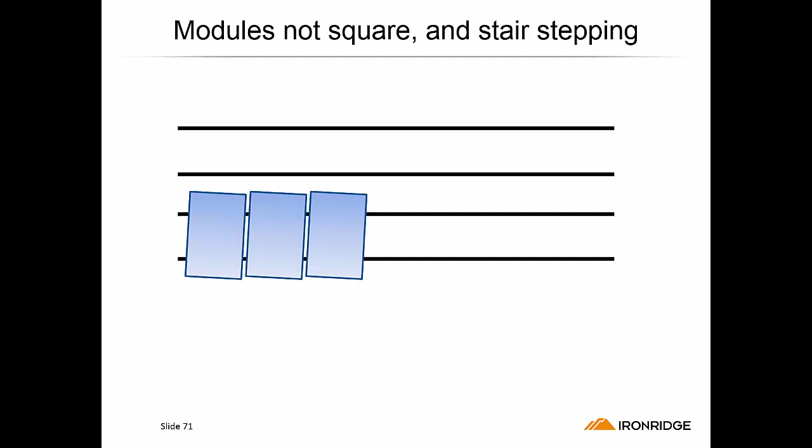I don't know how many times you've installed solar systems, but if you don't have your very first module perfectly square when you install it, you'll find that after about 4 or 5 modules down, you might be running downhill or uphill, depending on the skew of that first module. I've seen people do what I call stair stepping—they realize their modules are a little crooked and start fudging each module up a little, trying to maintain a straight line. I don't recommend this; it really looks ugly.

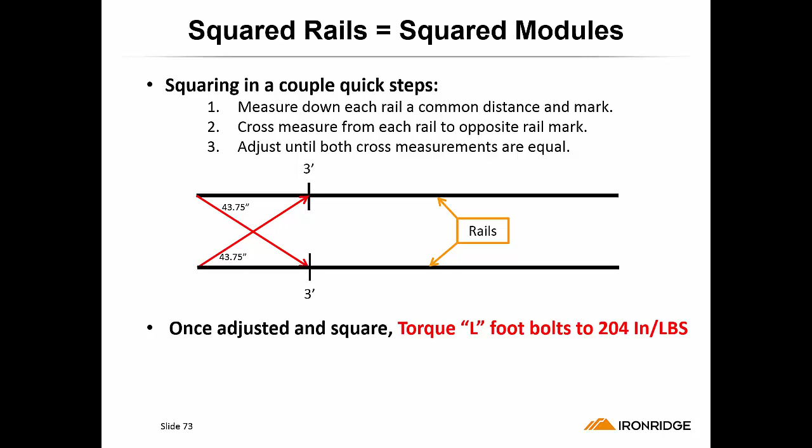What I recommend is that you square up those rails with the structure, get your first module mounted square, and then you're golden. Here's a little trick on how to do that: get your southerly-most rail, the one closest to the bottom edge of the roof line, installed exactly where you want it.

That 3-foot dimension is up to you—it doesn't have to be exactly 3 feet, just make sure that first rail is relatively square with the edge of the roof. Then adjust that first rail for your fire setback for the solar array. Again, it doesn't have to be exactly 3 feet, maybe it's 2 feet—whatever the local jurisdiction requires for a fire setback from the edge of the roof. Then tighten that first rail down exactly where you want it.

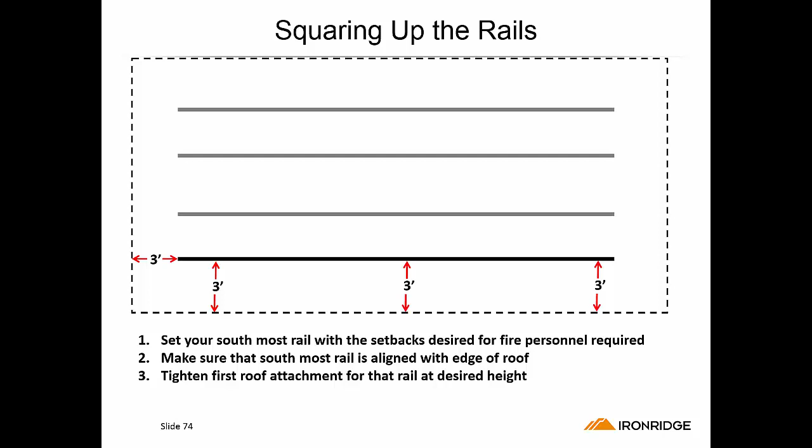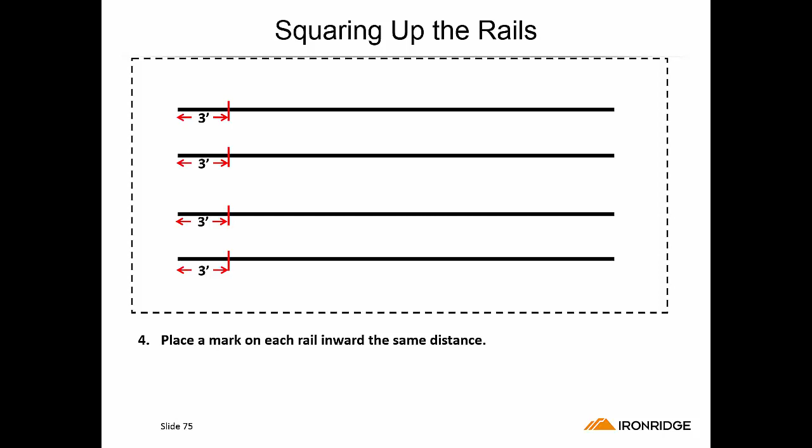Now give yourself a measuring mark on all the rails in your array layout—could be 3 foot, could be 4 foot, doesn't matter, as long as it's an even dimension marked the same on all rails. Now do a diagonal measurement from your first rail, locked in where you want it, to that second rail, and adjust the second rail back and forth until those diagonal measurements are exactly the same.

Once those diagonal measurements are exactly the same, now you have that second rail square with the first rail. Tighten that second rail down where you want it. You can go ahead and perform this up the rest of your array doing those diagonal measurements, and now you'll truly have all of your rails square with the structure.

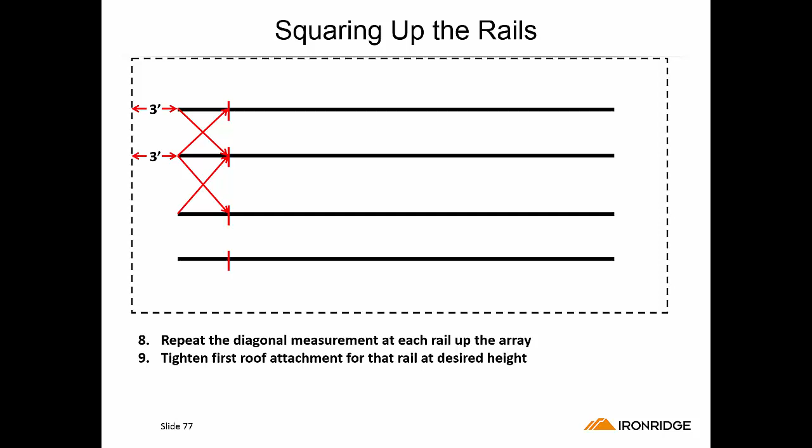Once you've done that, go ahead and mark each of the rails with a 1.5 inch mark. That's what's required for the end clamp to mount your modules. Take a minute placing the first module, making sure the frame of that module is right on your 1.5 inch mark, and tighten down your end clamps. Now you have your module square with your square rails. In doing that, you can very rapidly place the remainder of your modules, and they're all going to come out true, square, and correct with the structure.

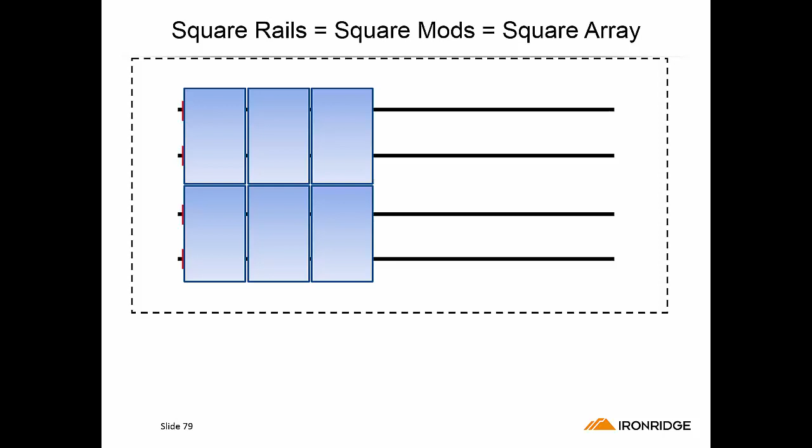As we're tightening down all of this hardware, we want to tighten it to the proper torque spec. For all the module mounting products, it's 84 inch-pounds of torque. What I would do is use a battery drill motor with a clutch, and have my torque wrench with me on the job site. Probably put that at a medium clutch release setting on the drill motor, install a couple pieces of attachment hardware, and then check it with the torque wrench. See what you're achieving at that clutch setting. If you need a little more torque, go ahead and adjust that clutch setting on the drill motor.

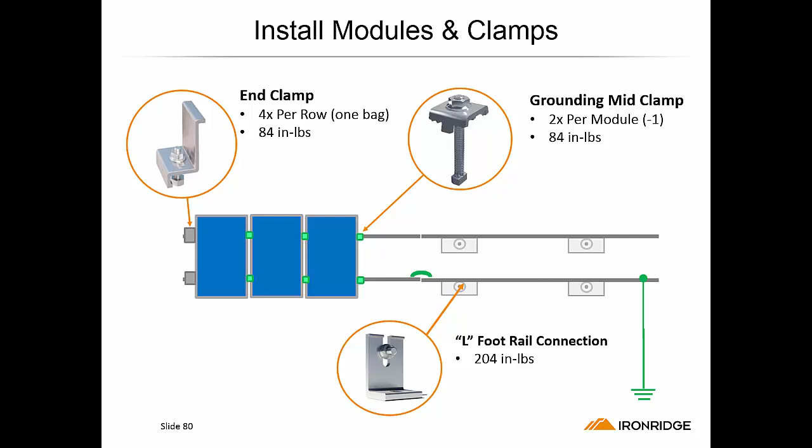Then go ahead and use the battery drill motor for the rest of your installation. You might do a random check occasionally with the torque wrench just to make sure the battery drill motor is still achieving the proper torque setting needed for the module mounting hardware. 84 inch-pounds is a minimum torque setting required by UL testing for the integrated grounding.

Here's a little tip on installing the mid clamps. After you have your first module installed with the end clamps and you're bringing your next module in, get your module in close to where you want it, get all your wiring done, and use those wire management clips for holding the cabling up properly. Then get the module just about exactly where you want it, and at the last moment drop the mid clamp into place between the two module frames.

You'll note that there's an indicator mark at the top of the bolt showing what position the T-bolt is in. If you turn the nut just a little bit, it'll turn the T-bolt into the correct position in the rail. Then go ahead and tighten it down with the drill motor.

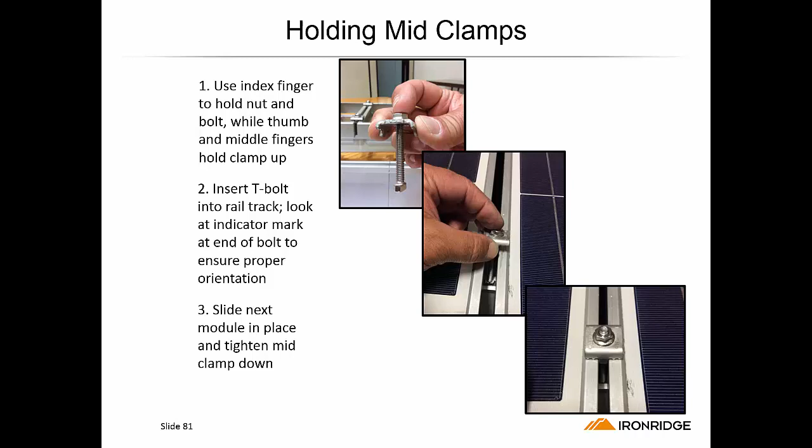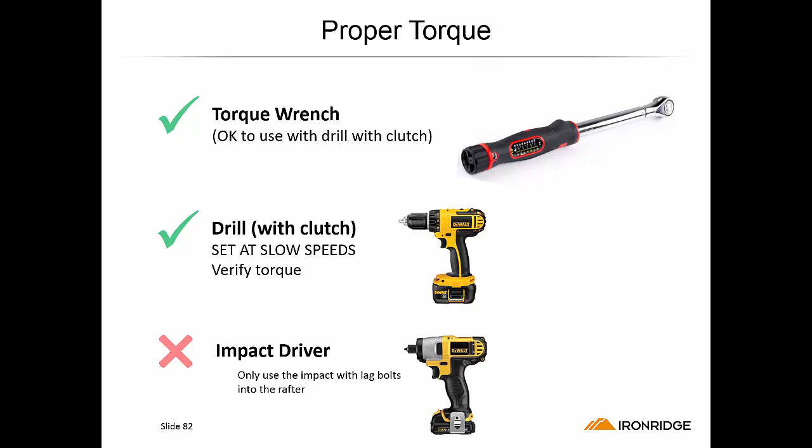I've already talked a bit about the torque wrench. I would definitely use a drill motor for installing the module mounting hardware, making sure you're adjusting that clutch setting on the drill motor to achieve the proper torque level with a torque wrench. Use the battery impact gun for installing the lag bolts of your flashing attachment products. But once you're done installing the lag bolts from the flashings, switch over to the battery drill motor with a clutch for installing the rest of your module mounting hardware.